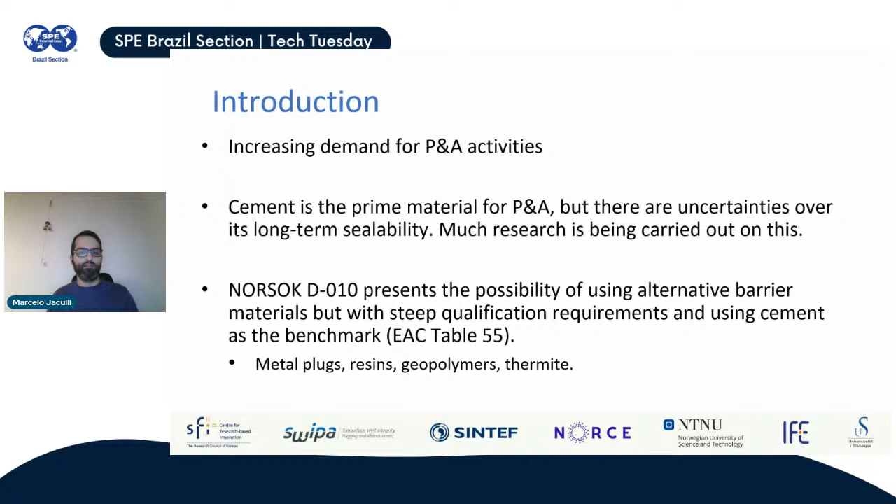There have been a lot of studies for many different types of plugging materials. Bismuth is within a wider scope of metal plugs. So you have bismuth-based alloys, but you also have other types of alloys. And then there are, of course, other materials, such as resins, geopolymers, and thermite, that can provide the well barrier elements that are necessary for you to abandon the well.

The concerns regarding cement can be summarized through this figure here. This figure has become really popular in well P&A articles because everyone refers to it. It's very good at pointing out what the leak paths are. If you consider a well that was abandoned with a cement plug, then we have several potential leak paths: across the plug, between the plug and pipe, between the pipe and the cement behind it, or between it and the formation. But specifically for the plug, our main concern is on these two potential leak paths here.

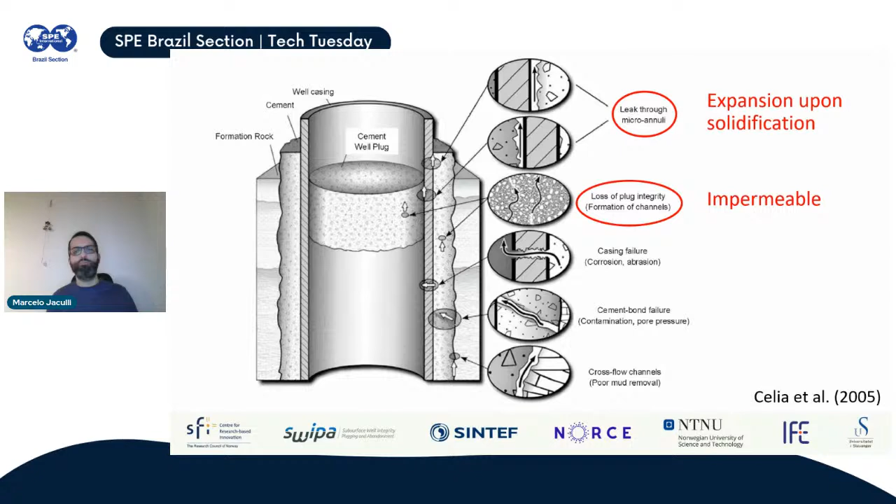You can have a leakage through the microannuli. So you have some gap between the plug and the pipe, and you could have leakage through this gap, since there are two surfaces that are touching but are not necessarily closing this gap completely. Or you could have migration through the plug, and that's a problem when you are using porous materials like cement, for example.

The idea of using a metal plug, and in particular bismuth, is because of two characteristics mostly. The problem with the microannuli is that if you are able to close it, then it becomes a smaller issue. And bismuth has a very unique characteristic: the capability of expanding upon solidification. After the alloy is melted downhole and you let it solidify, it starts expanding. Due to the expansion, you create a better seal with the pipe inner wall. At least that's the idea. So you will be dealing with the microannuli.

And by being a metal plug, you also have the benefit of a metal being virtually impermeable. So you are not expecting any leakage through the plug. You are expecting leakage through the microannuli, which may or may not be closed depending on how much expansion you get.

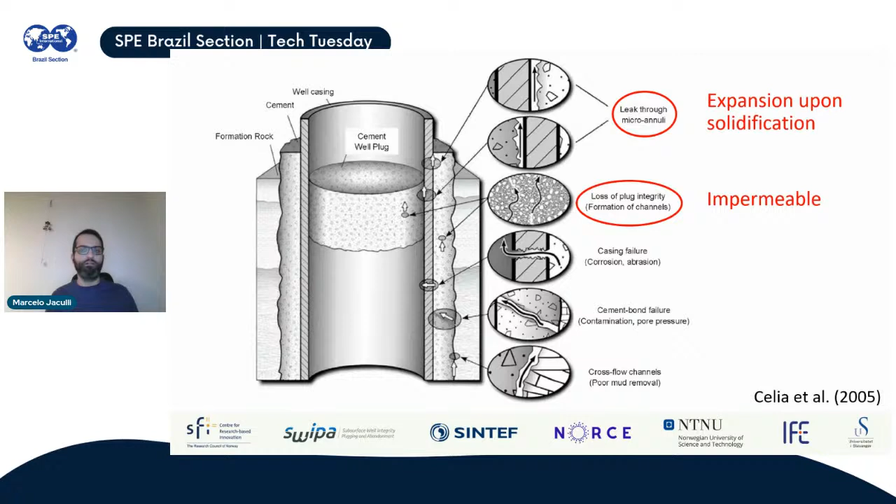So the motivation to start doing this research was to qualify the usage of bismuth as a well barrier material for P&A. And of course, there are other potential applications. You might want to use the bismuth as some form of helping the cement behind the casing as well. So it could be complementary to the cement, or it could even be a replacement to cement. And of course, that depends upon its qualification.

And the goal here for us is to study the sealing performance of these bismuth alloy plugs using laboratory tests in combination with numerical simulations. So we have been going through these two approaches, and I will explain why later. But that's basically the goal of our research group that is focused on bismuth inside this center.

But one big challenge that we had from the very beginning is that there is very little literature about bismuth in this application. So, well, actually, there was no literature about bismuth on this particular application. But you can find a lot of information about these bismuth alloys if you look at other applications, because these bismuth alloys have been used for a few decades on soldering, because they have low melting points, so they are very good for soldering. But aside from that, you cannot find anything like what we are trying to do here. You don't have a plug made of bismuth to plug an oil well. This has not been done before.

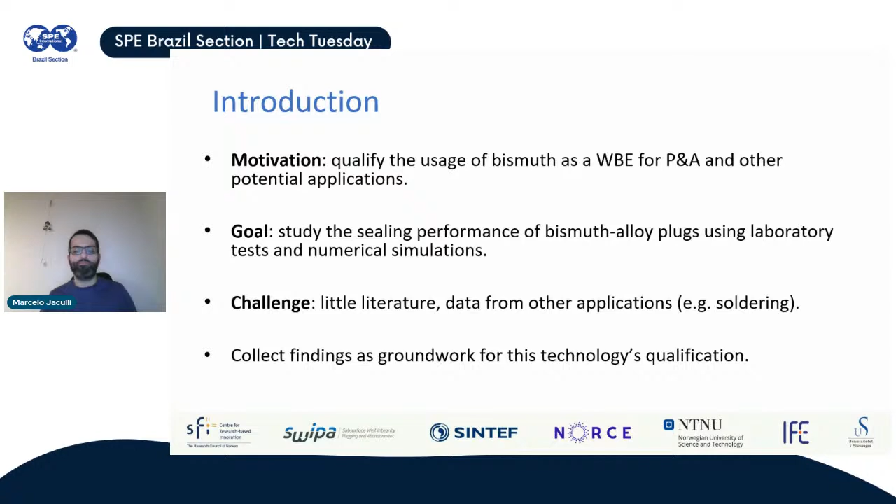So if you never heard about bismuth, don't worry. I had never heard about bismuth before joining this project. So bismuth is a material that is very unique in terms of characteristics. So the bismuth is a brittle material that melts at a very high temperature. Not very high, of course, compared to other metals, but to a temperature that would be unfeasible and unsuitable for downhole environments. But then bismuth can be combined into low melting point alloys.

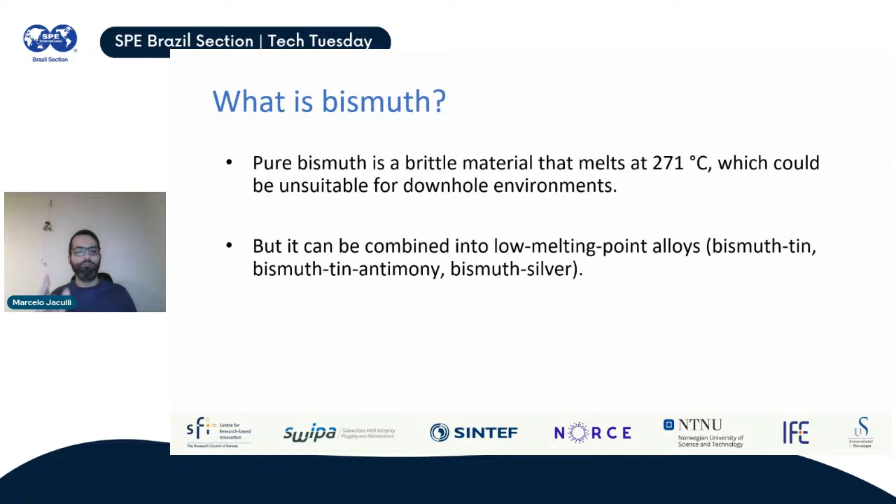So you have, for example, the bismuth tin alloy, which is the one that we have been studying the most. But you have other types of bismuth alloys. But these alloys have this very unique characteristic of expanding upon solidification. And this is something that doesn't happen with all metals. You have very few selected metals in the periodic table that display this kind of behavior when transitioning from a liquid to a solid state. I think it's bismuth, gallium, antimony, and I think a fourth element. I don't remember which one. So this very unique characteristic gives this kind of low melting point alloys very unique properties.

So then our focus has been on the eutectic bismuth tin alloy, and there is a reason for that, because eutectic alloys are better in terms of control over the melting and setting the plug process, because a eutectic alloy melts at a single temperature. As long as there is any solid material while you are melting it, it won't change its temperature. So you won't have a mix of solid and liquid phase. That's what it means being eutectic.

So we started using this as a starting point because it's what some service companies were trying to investigate. But we know that by now the companies are also moving towards other types of bismuth-based alloys. But we have focused on characterizing this one because I believe that whatever procedure, whatever results we get from this one can easily be extended to other types of alloys. You just need to follow the same lab tests, run the same simulation. So we basically have a recipe to test any alloy that you would like.

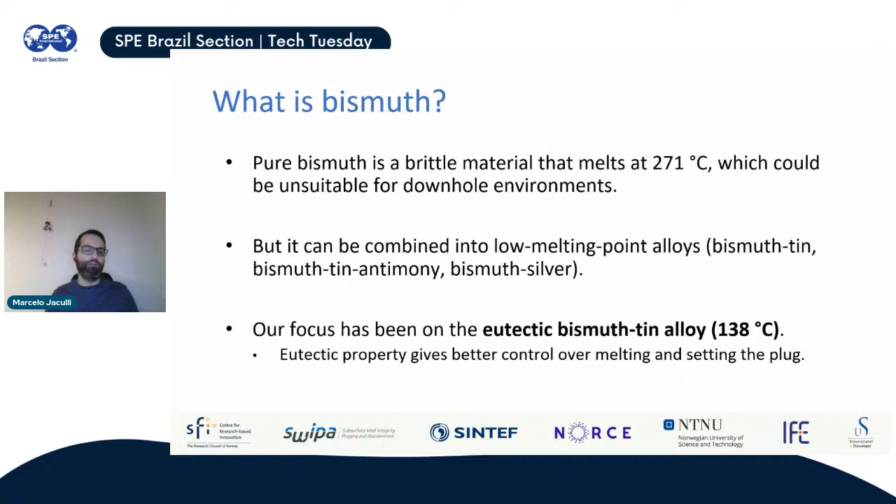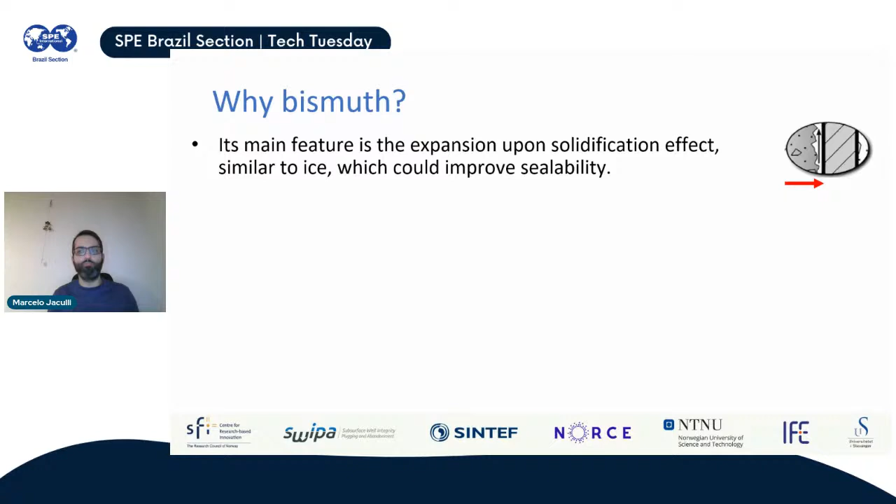Then why bismuth? Because of this main feature of expanding upon solidification, like what happens when water becomes ice. And the idea is that this can improve sealability. So if you remember from the picture, by having this alloy expand, you are reducing the gap between the plug and the pipe inner wall. And since it's impermeable, basically since it's a metal plug, you don't get any leakage through the plug, and then probably you can reduce the plug length.

So I'm saying probably because it's something that we are still studying and it's still being tested in the field. But if you manage to reduce the plug length, then that's a very good thing because you are, of course, saving material, and then it makes the solution more competitive compared to cement. So if you have a plug of cement and a plug of bismuth of the same size, the same mass of material, then of course bismuth is going to cost more than cement. But if you're able to shorten the plug and also perhaps shorten the operational time to settle this plug, then you are saving money. And then this becomes a very competitive solution.

And then we have an example from Aker BP that deployed some 2 meters plug in Norway. And it's on this reference that I can, if anyone is interested, can contact me. And they showed some promising results. But it was an initial test. The plug that they built was an environmental barrier, so it was at the very top of the well, not like very deep downhole as the last plug that you have there. But in any case, they also had to keep the cement plug as well, because you still cannot deploy only a bismuth-based solution. You have to deploy the cement and the bismuth-based solution. But they were able to verify some good results on this.

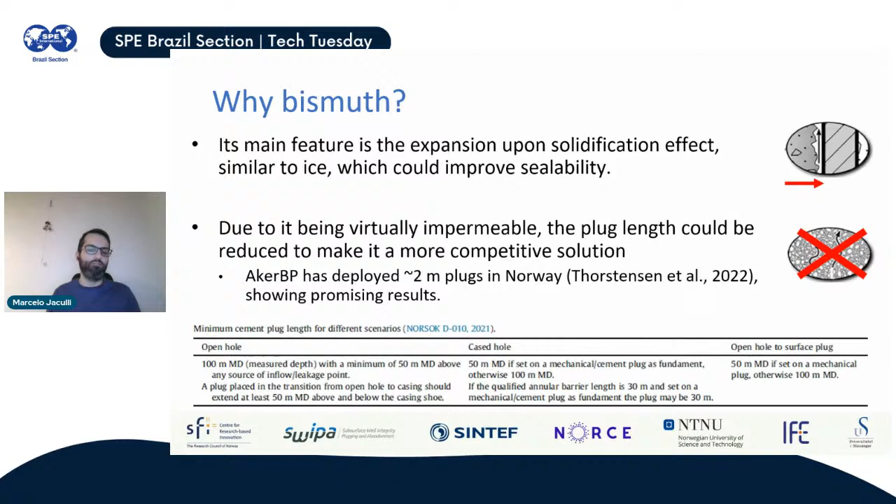proposing how a cement plug should be. So you have some requirements in terms of plug length. And then at another point of the NORSOK, it says that any alternative barrier material should have a plug length that is comparable with cement. But of course, we're not going to settle a bismuth plug of 100 meters here. We don't want to replace a cement plug for such a large bismuth plug. We want this to be shorter. But then, of course, we need to do the proper investigation for this to be achieved.

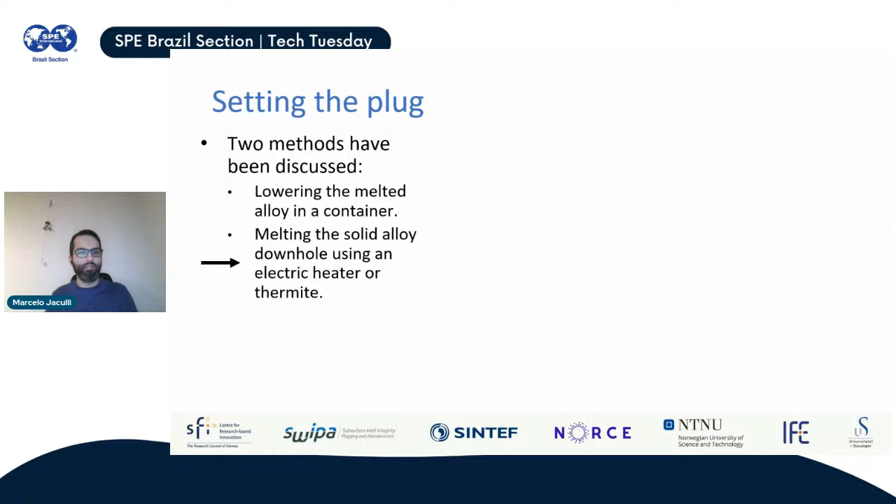To settle the plug, the literature, not just the literature, but patents that were made for this technology, basically propose two different methods. One would be pouring the melted alloy already inside a container and then lowering this into the well. Or you have the option of melting the alloy inside the well. So you lower it in the solid phase, and then you melt it downhole using some electric heater or some thermite reaction. So I have a video here from one of the service companies. You can visit them on their website, but I do not represent them. I just think that the video is very good at showing this. So I'll jump straight to the point here.

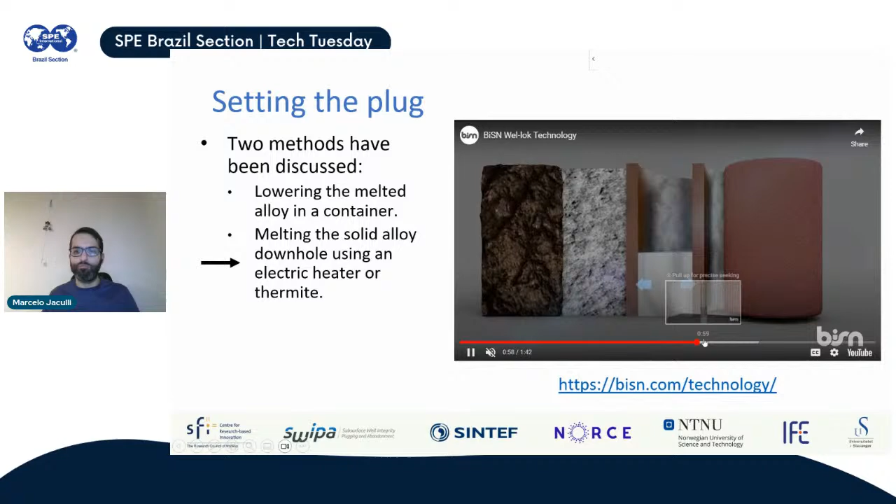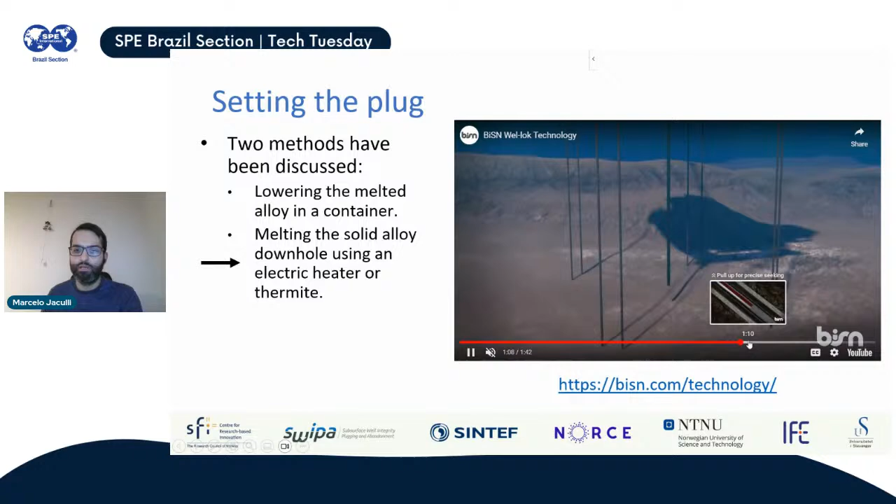Where they show where the technology is being placed. So you see here that a tool is lowered into the well. And then when it reaches the position where you want to set the plug, you see this silver-like material here, which is the bismuth alloy. You lower it kind of like a pipe, which is encasing, which has some hollow portion inside, and then you have the rest of the tool here, and then you start a thermite reaction from inside, and this melts the material that is in this pipe. So you see now it becomes liquid, and then it's going to fill completely the space inside the casing. So that's the idea. You are going to create this plug here, and then you are going to close the whole gap here. So you can see from the tool that you had some gap here in black, but then the idea is that this closes the gap completely after solidification. And then that's it. You basically created the plug.

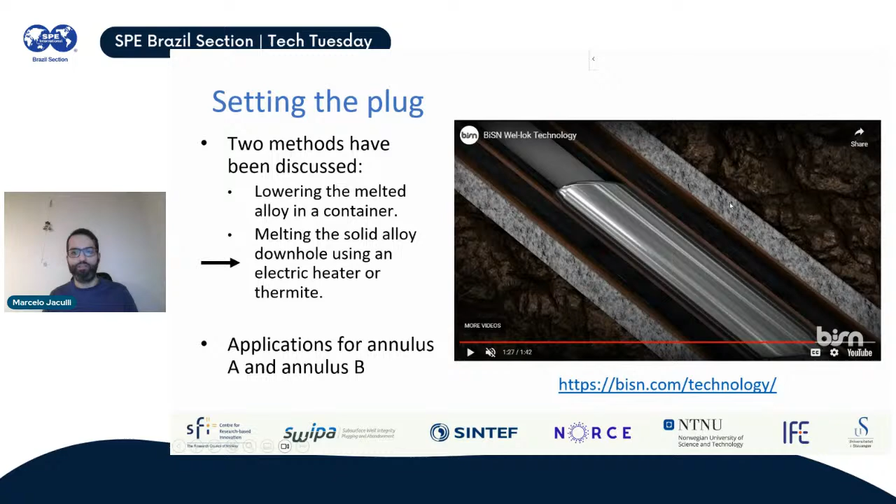And as I mentioned in the beginning, we have applications for setting a plug. It's possible to apply this to settle a plug inside the casing, but you could also use this in place of the cement behind the casing, because it could even help a poor cementing job by pumping extra bismuth, or you could even pump bismuth within the cracks here of cement, which is something that was also investigated by them.

But one important aspect here that differentiates it from other sealing technologies and other alternative barrier materials as well, is that there is no type of chemical bonding between bismuth and steel. They are two metals, so they are not going to interact with each other. You are basically setting a plug there by allowing this solidification to happen, and then it will be a combination of the bismuth expanding inside the pipe towards the pipe inner wall, and then friction, of course, is going to happen between the two metallic surfaces.

And this is going to provide us what we call the hydraulic shear bond strength. In other words, it's what's going to hold the plug in place. So there is no chemical bonding, but there is this kind of adherence between the two metallic surfaces.

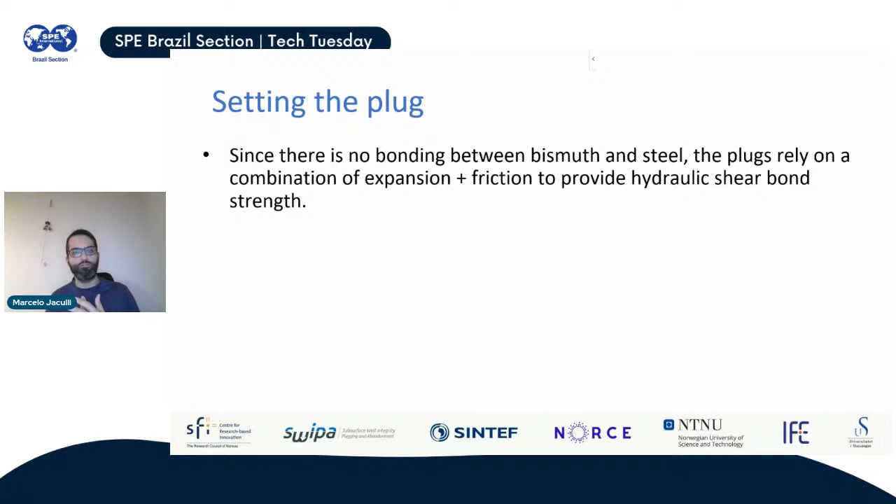So, of course, you might think, oh, is pipe roughness something important? Yes, and it's something that we are investigating. But we do believe that depending on how you leave the casing inner wall, that roughness will be a key factor on how much pressure this plug can withstand later.

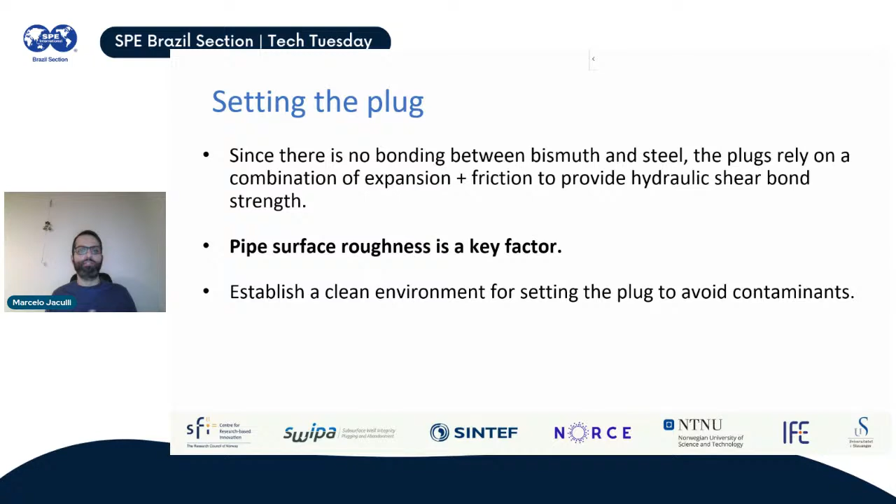And then, of course, you also need to be worried about contaminants. So if you have to clean the casing before settling the plug, then you have to take these two things into consideration. You might not want your casing inner wall to be as polished as possible, because that might not be able to settle a good plug. But at the same time, you want to try to avoid contaminants so it doesn't undermine the plug strength. So yeah, there is still some discussion on what's the best downhole conditions before you set the plug.

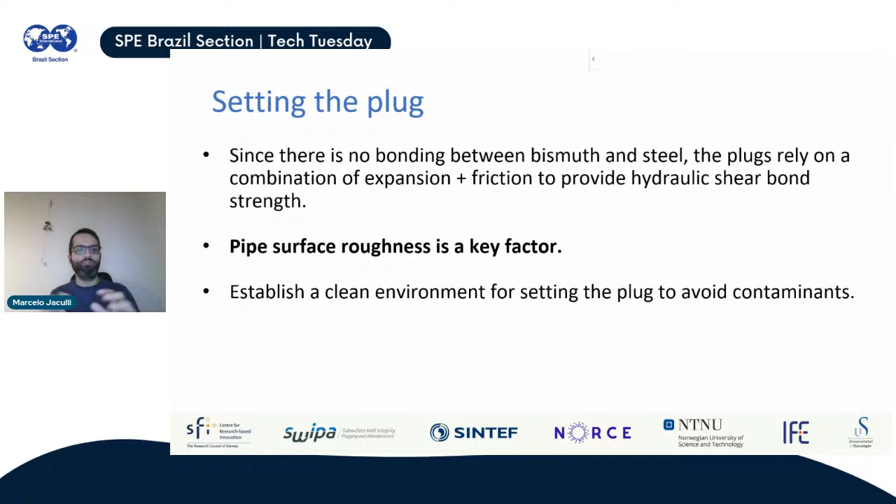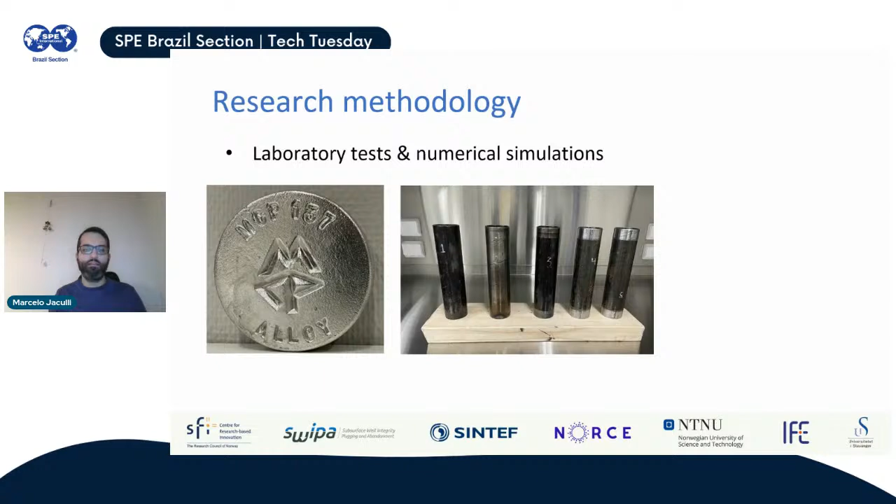So here, just for curiosity, we have some pictures from the lab. That's the test that we have been running. You have some pipe samples that were provided to us. And here you have the alloy that we buy from a manufacturer, which is the eutectic bismuth tin alloy. You can see here the 137 is the melting point. Then we melt this, pour it into the pipe, let it solidify, and you create a plug like this. So that's basically the idea.

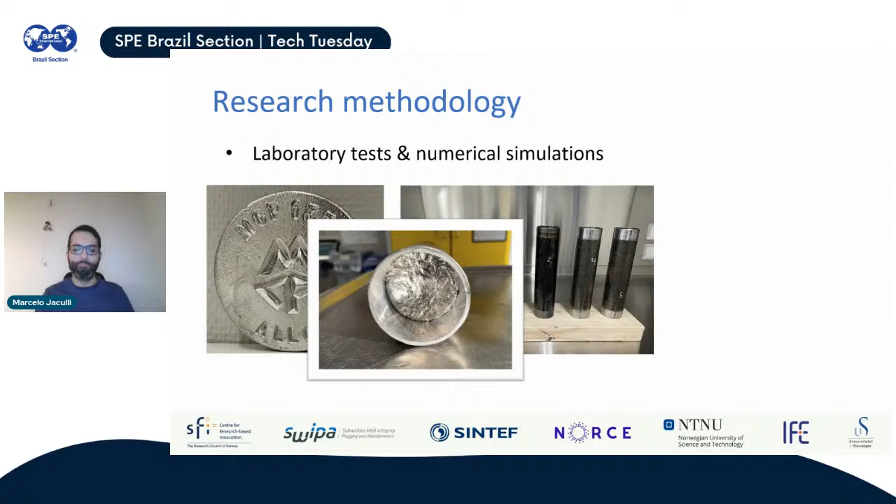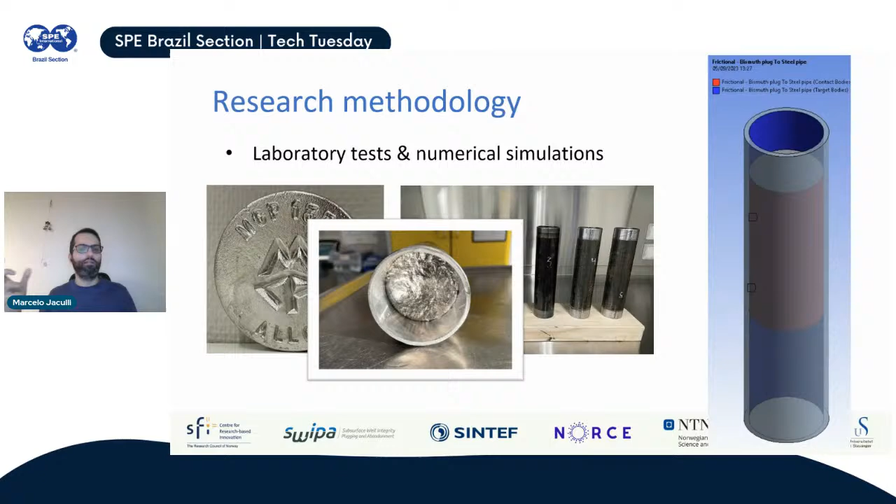And then we take this pipe with the plug inside, and we go to the machine to perform the hydraulic push-out tests. So basically, you're applying pressure at the top of the plug, and then you see how much pressure it can withstand. Or you also measure the leakage rate through the pipe, so you can collect fluid at the bottom and see how much is leaking. And then we take this to the software, and we try to match the laboratory tests with the numerical model. So if you are able to match the results in laboratory conditions, then we know that we have a good material model for bismuth. And then we can hopefully use this simulation knowledge to simulate other conditions that cannot be easily tested in the lab.

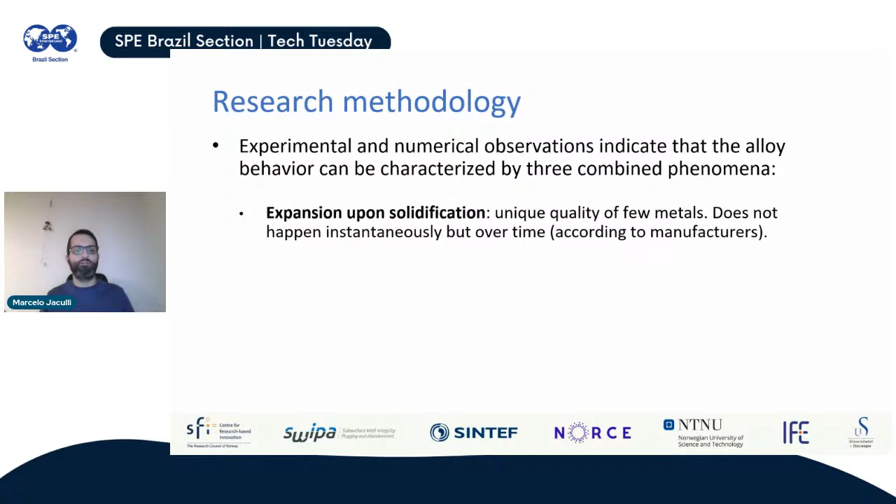Yeah, and I think that's basically the main goal of our numerical model, what we can provide in terms of characterization of this alloy. Based on our experimental and numerical observations, we realized that this particular problem is very unique in terms of the characteristics of this alloy, and it can be characterized by these three combined phenomena. The first one is the expansion upon solidification that I talked about so far. It's a very unique quality of this alloy, and it's its main selling point, basically.

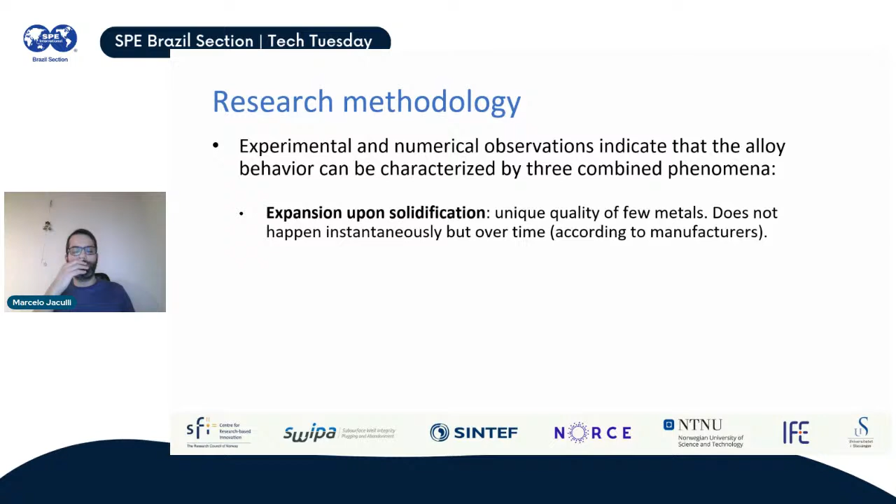But one thing that is very important that manufacturers claim is that this expansion doesn't happen instantaneously when the phase changes. So after the liquid alloy becomes solid, it's not going to expand completely, but it's going to expand over time. So you are expected to have some improvement over time.

However, you also have creep behavior, which can be relevant for this alloy depending on the temperature that you want to apply this for. If you have temperatures that are closer to the melting point, remember the melting point of this particular eutectic bismuth tin alloy is 137, 138. So if you are operating at a temperature above, for example, 100, you're going to get a lot of creep behavior. And creep is something that undermines the capability of the plug of sustaining the loads. So then you're going to see a decrease in the amount of pressure that you can apply on the plug before you actually break the seal. So this is an effect that is competing with the expansion, and it depends on the temperature condition where you are setting the plug.

And finally, on top of all that, we have an effect of aging, because any metal material may lose its properties due to the high load over some sustained long period of time, and also if you are applying this at high temperatures.

So then it's going to lose its properties, and therefore it's going to decrease its sealing capability. So that's something that also needs to be investigated. There is some data you can find on this, but not completely. But it's an important effect that you have to take into consideration, especially since this plug is going to be there for a very long time. So you need to take into account the degradation of this particular material.

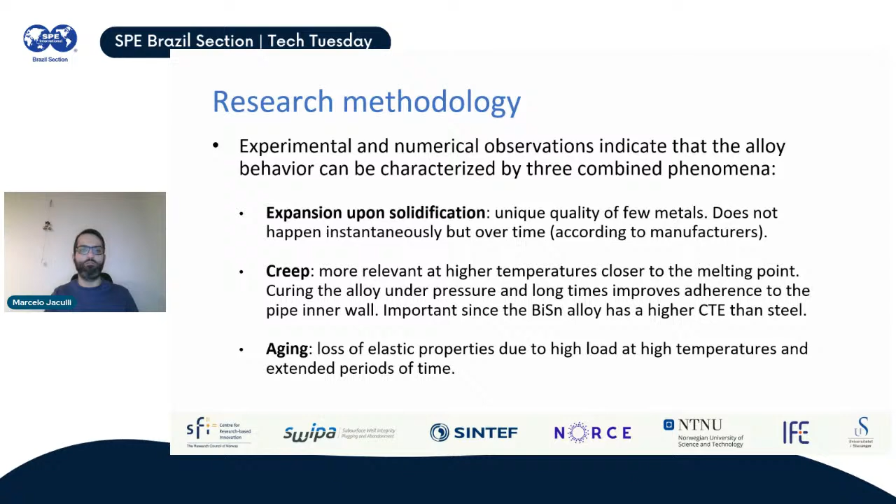In this literature review, we put some very preliminary results that we achieved by performing some leakage tests with nitrogen gas. We had plugs of similar length of bismuth and cement, and we saw that the leakage rate through the bismuth was much lower than it was for the cement. But of course, I have to put a big emphasis here that this is applicable for that specific test condition. You can find more details in the publication that I mentioned at the beginning. But this is going to hold true for that particular condition.

And then it's up to us to study how we scale this in terms of reducing the plug length. For example, if we are comparing two plugs which have similar plug lengths, that's good. Bismuth is going to behave better, but it's not necessarily the best solution, because we actually want to reduce the bismuth plug length. And when we reduce the plug length, it might be more comparable with cement. So that's something you need to investigate further. But the results that we saw from the very beginning, both from the lab and from the field applications done by AkerBP, show that bismuth has a lot of potential in terms of reducing leakage rates. So that's the whole motivation behind pursuing this technology.

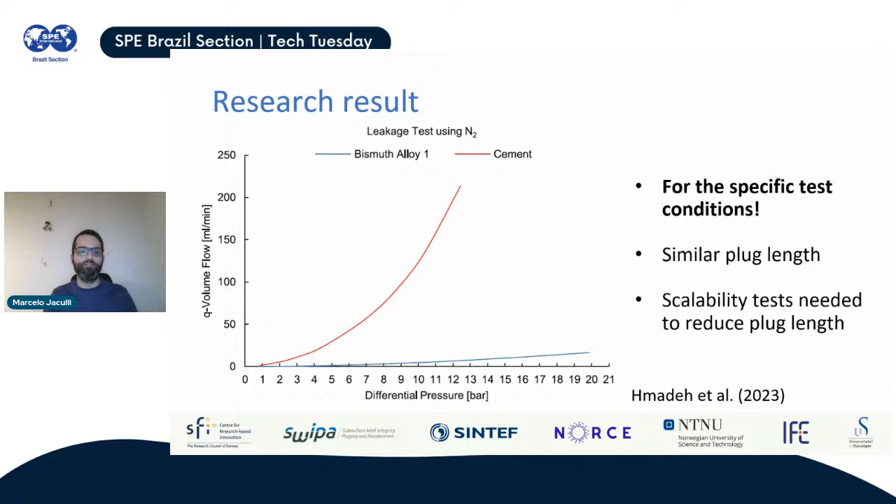I would like to continue by telling at what point this technology currently is. If we think about a qualification process according to the NORSOK framework, there are some criteria that an alternative barrier material must follow. Some of these criteria are already answered by what has been done so far, but some others still need further investigation. So it's this panorama about the technology that I would like to bring here. An alternative barrier material must exhibit long-term integrity. Well, that's the big question that we're still trying to answer. But I think that's the final answer that we will have when we collect all the data about this technology.

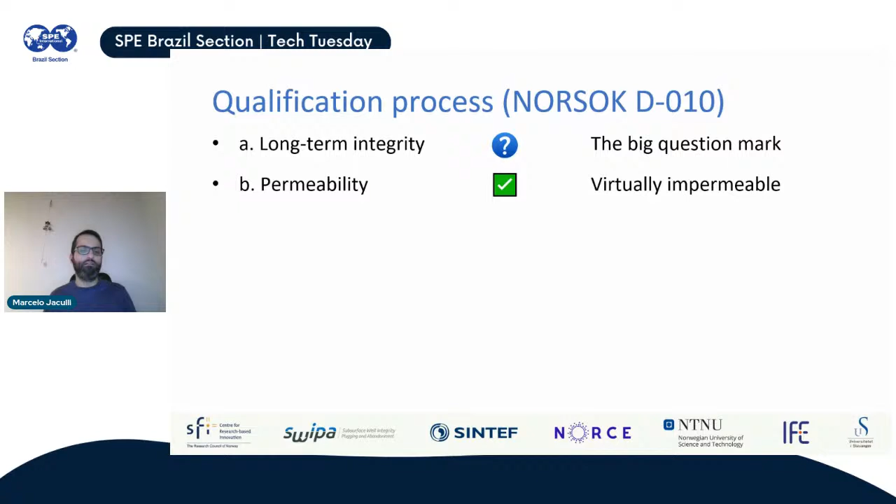So will the bismuth plug be capable of holding long-term integrity? We still don't know, but there is a lot of potential. So that's why we keep pursuing this technology. An alternative barrier material must also have a very, very low permeability. That's a good thing. From the very beginning, you can say that the material satisfies this condition because a metal is virtually impermeable. So you are good on this one.

An alternative material cannot have too much radial shrinkage. There is some accepted limit on this. You have shrinkage from cement. It's a well-known effect, and there are a lot of studies on how to improve the cement. There are a lot of additives that you can put in cement to combat this particular shrinkage. But for the case of bismuth alloys, that's also solved from the very beginning because the alloy expands instead. So you have no problems with radial shrinkage.

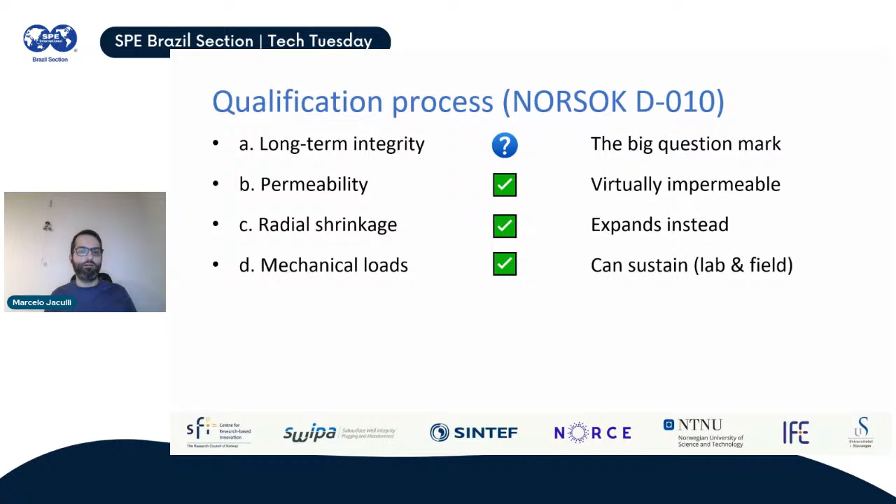Then sustaining mechanical loads, that's up to the conditions of where you're going to apply it. But in general, based on the lab tests that we did and on the field application from AkerBP, we can say that yes, the plug is able to sustain the mechanical loads that are expected from it, in the same way that cement can also withstand these mechanical loads. So for this one, we have collected a good amount of data to at least give a check mark. Sustaining the mechanical load is not the issue.

Chemical stability, that's still something up for debate. For example, if you were talking about pure bismuth, then you don't expect corrosion from pure bismuth. It's resistant to corrosion. But after you start adding other elements into the alloy, it might not be resistant to corrosion anymore. So I think this deserves more investigation, especially for the bismuth-tin alloy, but also for other alloys that the service companies are probably investigating as well. And this is important because you don't want your plug to be consumed by corrosion. So it's something that is still up for debate.

Bonding to tubulars. Any alternative material must be able to bond to tubulars. But as I explained in the beginning, there is no chemical bond between bismuth and the steel. Because there are two metals, they are not interacting with each other. We're not welding them together. So the only type of bonding that we have is mechanical bonding. It's an adherence between the plug and the pipe inner wall. We have friction holding them together, and we can say that the plug is bonding to the tubular due to friction.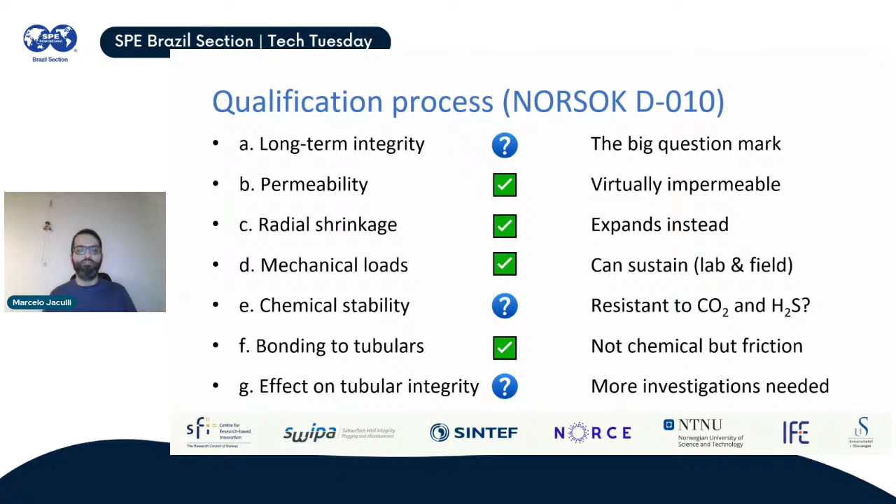And finally, the effect on the tubular integrity. Any alternative barrier material must not damage the tubular in which it's placed. This is something that still needs more investigation because we don't know yet the full effects of having this plug expanding inside the casing. It could damage the casing, it could damage the cement behind the casing, or for example, it could close cracks in the cement behind the casing. It could close microannuli between the casing and the cement behind it. So there is both the potential of doing damage and the potential of solving other issues. That's why I also believe this needs further investigation.

And then we also list some other further challenges that would still need to be tackled. One of the things is that we don't have enough data on different bismuth alloys. At the beginning I said we don't have any data at all. Now we have some data on one type of bismuth alloy. Then there is still a long way to go if you want to qualify bismuth alloys as a whole, because there are different types of alloys with different melting points. So they potentially have different applications depending on particular well conditions.

There are some issues related to the melting process. You saw from the video that you are lowering a tool with the bismuth alloy, and then you are melting it, and then it falls into the well, and then it closes this annular gap. But there is the potential for this heater to be stuck there. You want to retrieve this before the alloy solidifies, but if it solidifies first, then you are probably going to have the heater stuck there. So that could be an issue. You could have a problem with the thermite if you are using, for example, a thermite technology to melt the alloy downhole. You could maybe not be able to melt everything depending on how you ignite the thermite.

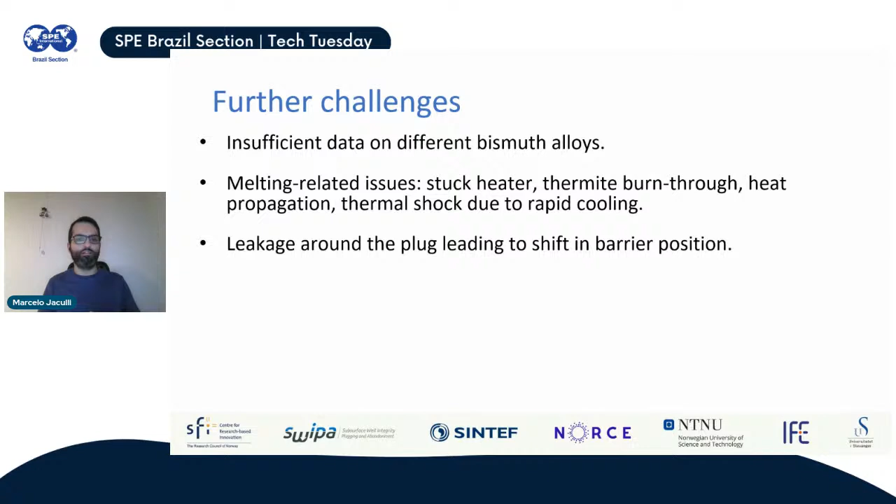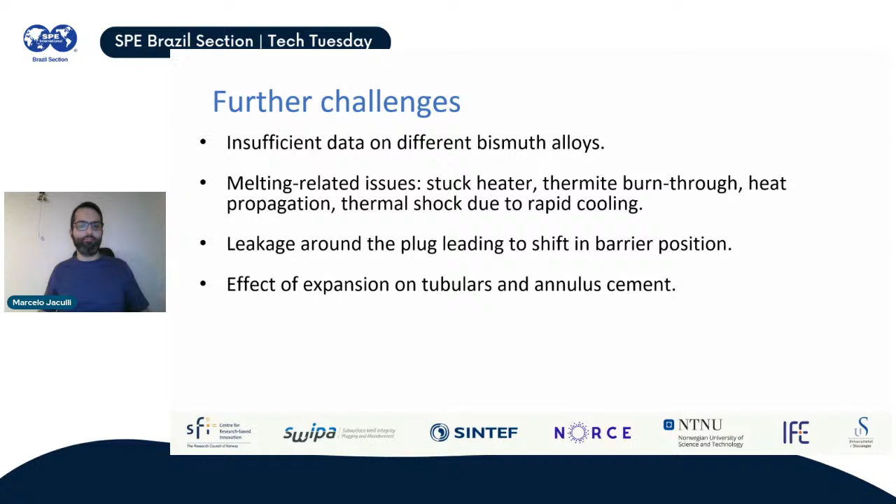We could have some problems when setting the plug. If you have some leakage around it while the alloy is still solidifying, you could have some shift in the barrier position. The plug might move from the intended position, and then you don't place the barrier where you want. It's kind of similar to what also happens with cement. Sometimes in some cement jobs, you are unable to put the cement in the position that you wanted and to reach the top of cement that was expected. So the same could happen here when setting this plug. And then you have the effect of the expansion on tubulars and the cement behind the casing, which I already addressed in the previous slide, but it's a concern here that needs more investigation.

And then you have some problems related to the material properties. You have creep behavior, which is relevant for high temperatures. So you might be unable to use a particular alloy in a well whose temperature is closer to the melting point, because that could damage the sealability of the plug. And then there is some threshold temperature at which you can use this plug safely. Otherwise, you need a different type of alloy for that particular application.

There is a concern about liquid metal embrittlement. This is a phenomenon that happens when you have a solid metal, in the form of the casing steel, and then you have a liquid metal in the form of the molten alloy. There are some known interactions in the literature where some liquid metals can damage solid metals and damage their properties.

But the interaction between liquid bismuth and solid steel is completely unknown. No one has investigated, at least it's not published, anything regarding if liquid bismuth can damage solid steel. So I think this is also a challenge that needs addressing. And then again, the problem of corrosion reducing the plug length, it's something that you don't want to happen, because then if your plug length is reducing, you are losing the intended sealing capability that you designed at first.

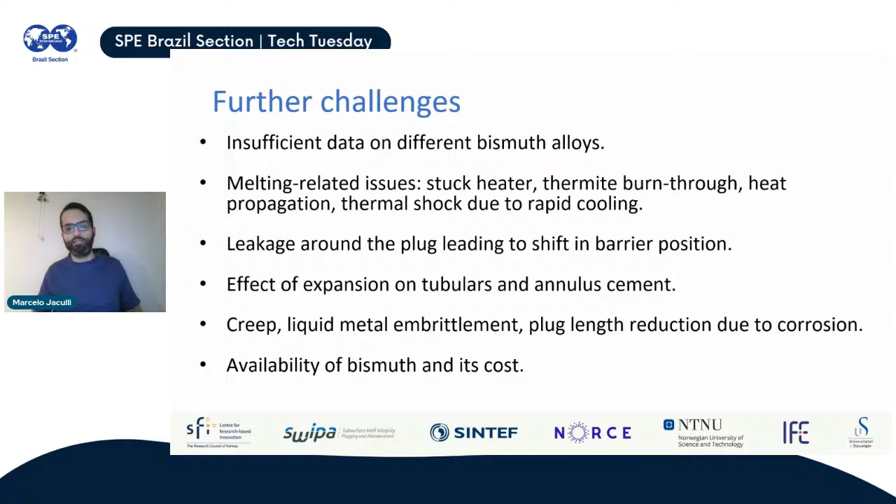Then you use this under specific conditions. If you have a very problematic well that you need to do the P&A on, or some particular condition where you are okay spending more because you need the further integrity. So of course, cost is an issue that has to be addressed.

So to conclude, the idea here was to present some preliminary results, our preliminary feelings about the technology, so we understand what's happening behind this metal-to-metal seal between the casing steel and the bismuth plug. But as I explained, there are several unique mechanisms that are not seen in other applications, and some of these are very unique properties of bismuth alloys.

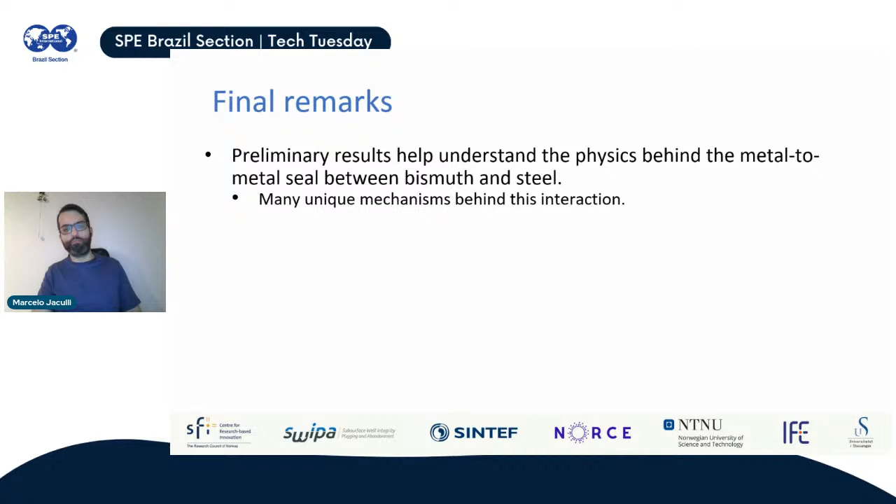So there are a lot of things to investigate for this particular application that you cannot extrapolate from other sources. And some things that are interesting that we intend to investigate here is the effect of pipe roughness, if this improves the sealability. And when I say pipe roughness, I mean the inner wall of the casing. And also the effect on the cement behind the casing. So that's something that also needs to be verified.

And from a numerical simulation point of view, I do understand that the companies also run their own simulations. So we believe that if we can provide some groundwork on how you model bismuth, if you want to run simulations for this particular problem, that's a very good contribution for the industry, because you won't be able to test all the conditions, you won't be able to test all the alloys. But if you have the data and the procedures, if you have a recipe on how to do this, then you can run all these scenarios using whatever software is available.